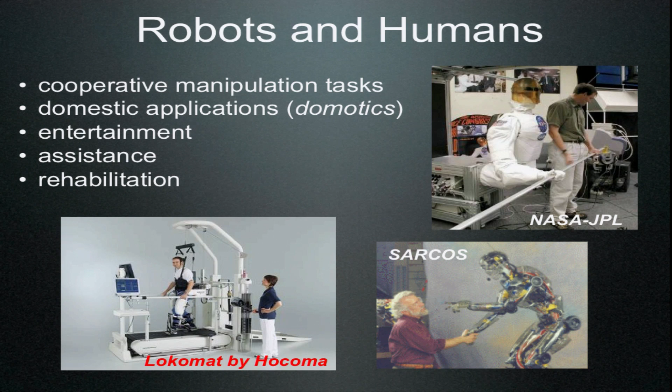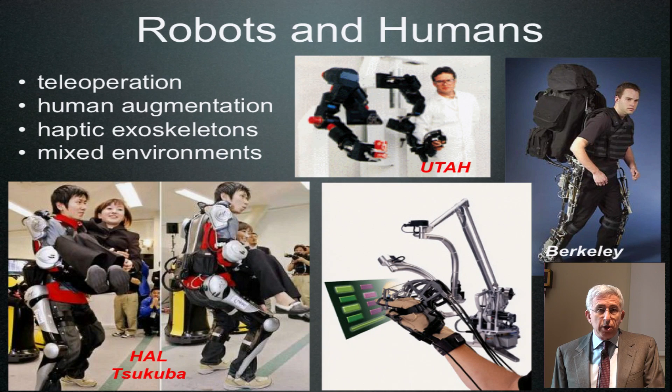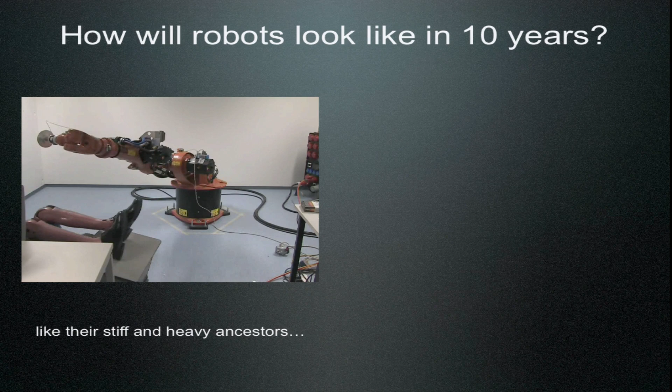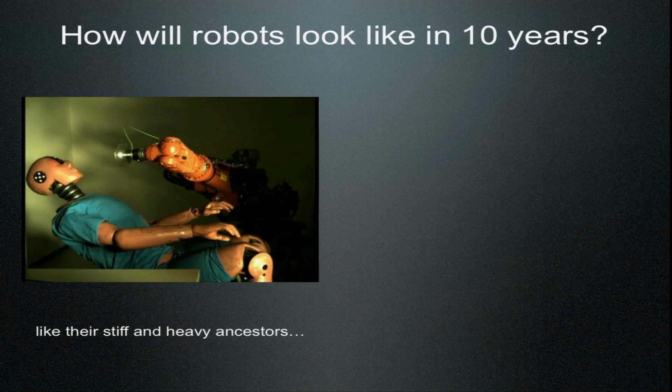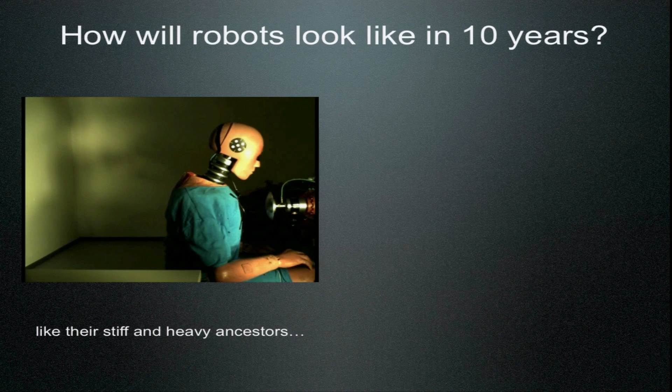So how would robots look in 10 years from now? Here you see a video recorded at ADAC in Germany, the safety institute for automobiles, where they use dummies for crash tests. And now, instead of having a car, this is work done mostly by Sami Haddadin. So they are investigating the harm, the injuries that can happen when a robot is hitting you. And it can hit you in different places.

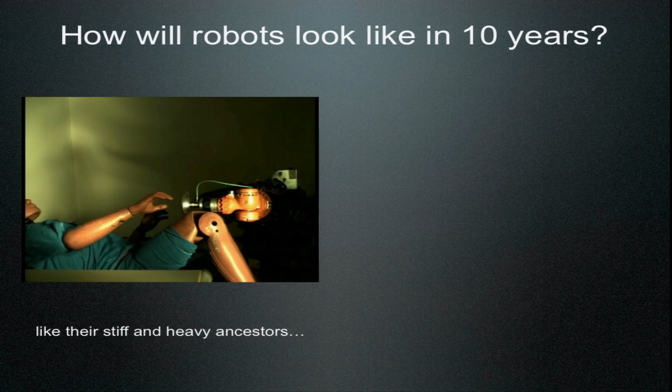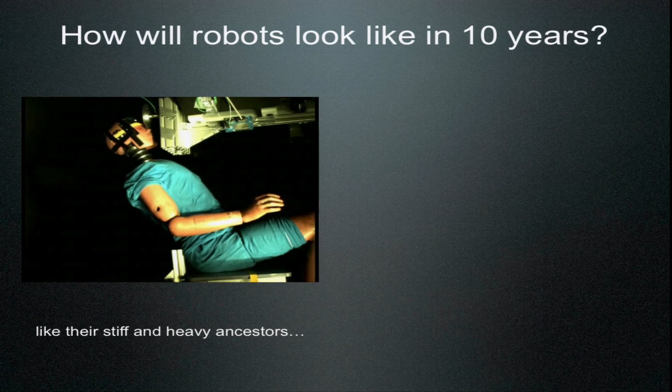But the purpose of this video is not showing this experiment, but looking at the robot. Looking at the robot, the dummy may represent ourselves, very flexible, very vulnerable, and the robot is very stiff, heavy, and could be fast, and could really hurt the human.

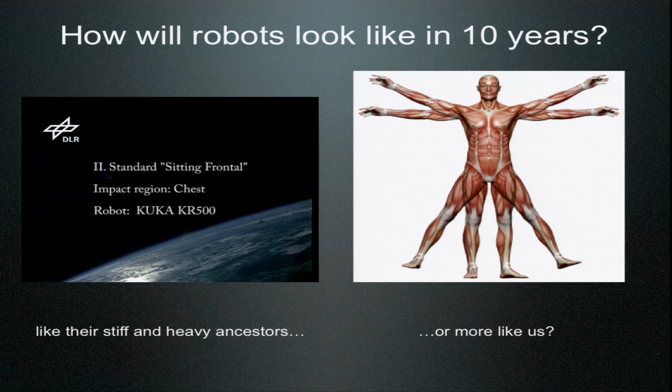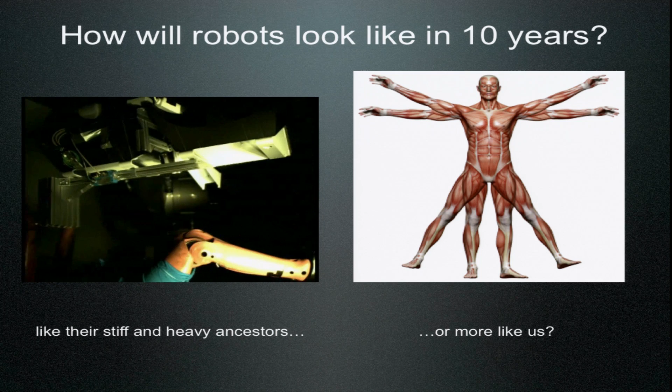So will robots continue to be like this in the next decade or so, or will they more and more inherit some bio-inspired morphology, in particular actuation capabilities of the human, which at the same time are able to perform such different tasks, which involve accuracy when needed, or compliance where needed, to accommodate for uncertain environments, uncertain forces applied to your body, and still provide sufficient accuracy. So performance is not lost at all. Of course, this is a trivial question, because the answer is clearly we would like them to behave like us.

So let's look back at the recent or less recent past. I remember very well all these devices. You may have not seen them at all. I've seen them working. So many years ago, yesterday, there was the famous Unimation Puma robot.

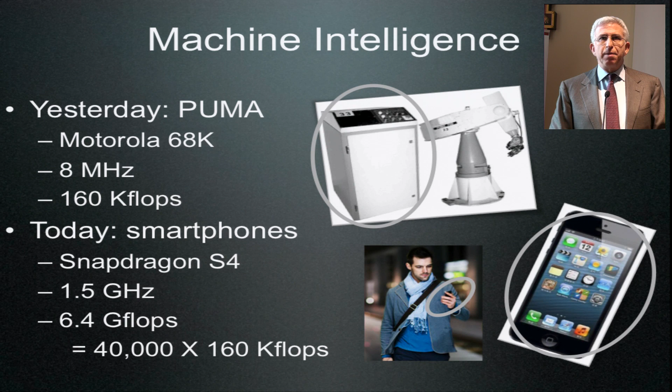This was the first anthropomorphic 6 degrees of freedom all-revolute joint robot, controlled with microprocessors. Okay, actually, the control unit was a PDP-11, a mini computer, which was as big as this. You can tell the size of this. And inside, it had a Motorola 68K CPU with 8 megahertz of sampling and the capability of doing 160 kiloflops operation per second.

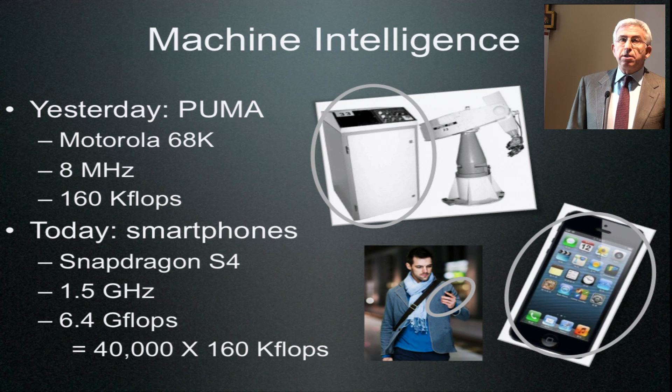Okay, so this was yesterday. In terms of machine intelligence, you could do several things. You could do direct and inverse kinematics, even inverse dynamics for the Puma. This is a result of the 80s, I would say. Now, if you compare the computational power with, for instance, today's smartphone, please turn them off if you have it. Well, there's a factor of thousands of improvement, okay? And in fact, in such teeny devices, we can embed a lot of intelligence. So we would think that this is an advance, and in fact it is also for robots and robotic systems.

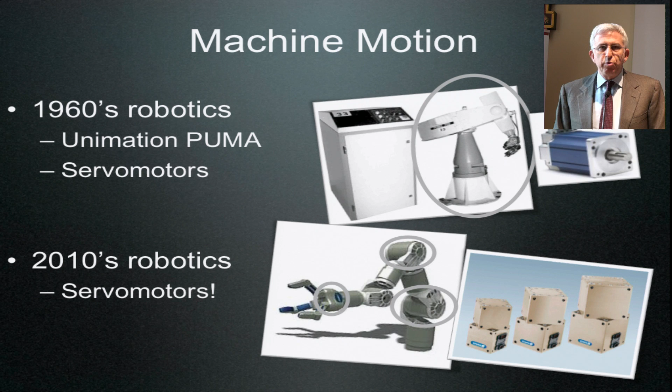What about motion? Remember that a robot is the intelligent connection between perception, so sensing, and action. So the motion is always there. Otherwise, you have just a computer. Okay? So progress in computers and miniaturization and computing power. What about motion capability of robots? So yesterday, the Unimation Puma had servo motors. Here you can see one. There have been a lot of advances in this type of devices in terms of power density, size, cost, and so on. What happens now, or let's say 5 years ago now? Still servo motors. Okay, so not really this 40,000 factor of improvement that we had in other devices.

So the problem that here we want also to help to address is how to make robots that are soft, so that have a morphology of a human body. They are likely not to hurt if they hit a human being, but still strong to sustain loads, carry things like the industrial robots with 160 kilograms of payload or more. On the other hand, we would like to have it simple, because complexity is not something that we're going to sell in the next year, okay? Or at least the complexity should be hidden behind a very simple interface, okay?

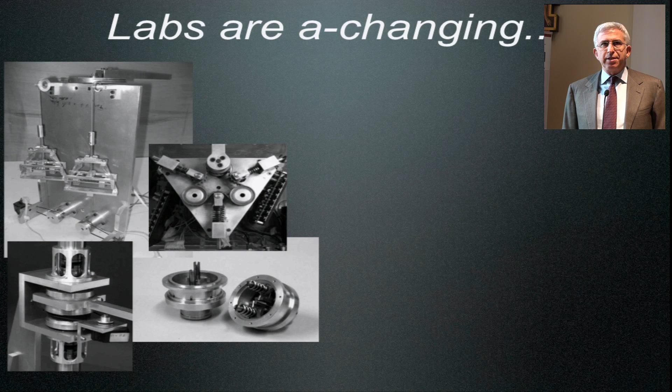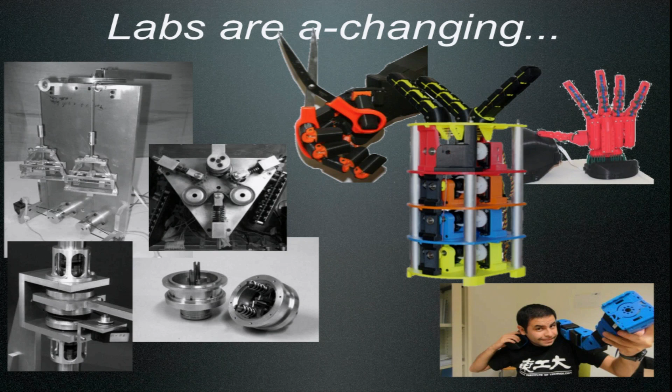So these are some variable stiffness devices that have been developed over the years in Pisa. I can recognize the VS1, VS2, other devices with nonlinear springs acting in an agonistic, antagonistic way. But this is a gray area. It's gray, it's on purpose black and white pictures. Why? Because the latest activities in that lab in particular are full of colors. Full of colors means also full of novel prototypes that can be developed very easily thanks to innovative technology in rapid prototyping, thanks to open source software and open source tools, using the web to grab whatever other researchers have already developed and things like that.

Okay, so the robotics labs are becoming colored, which means that we can explore new ways and test them in relatively short time. This is a very important thing. And you can see here on the right some variable stiffness actuation, the hands, the Pisa IIT hand, and also a modular structure built with the QB modules that you will put your hands on in this school.

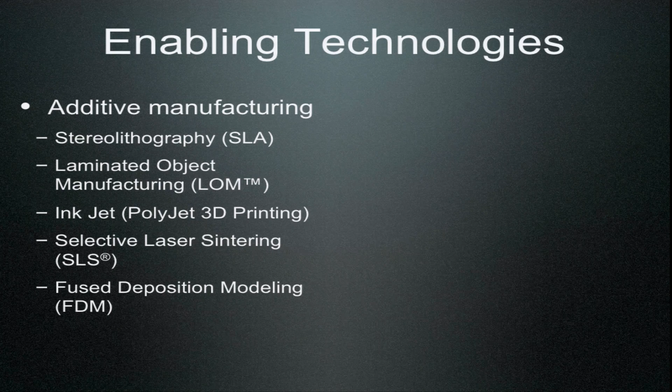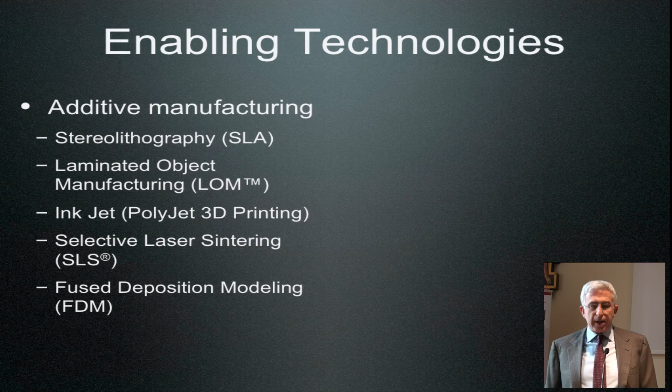So what are the enabling technologies for doing this step? So first of all, additive manufacturing. There are a lot of methods, techniques for building in very short time and cheaply from 3D designs, CAD designs, objects that you can use and test your ideas for developing actuation and, say, connection devices. Here is a list of several of them. You know that the 3D laser printers are really taking speed, and the technology is changing. If you have one of these devices bought 3 years ago, it's already outdated. Okay, because there are much more cheap, compact, and performant devices right now.

And this is just a list of technologies. Together with this, another enabling aspect that allows us to develop new, in particular, actuation devices and full body robots is the availability of open source embedded systems and control systems, like the Arduino project. I don't know how many of you are familiar, certainly the Italian attendees, but not only. There are new sensors, because we try to understand internally what's happening in all the parts of our devices, because this allows us to control them in a better way.

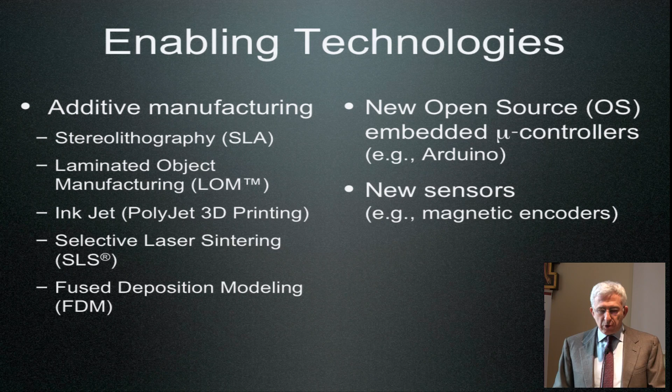There are other tools which are very useful in this development, which allow us to easily obtain hardware-in-the-loop systems, so that you have the hardware developed, maybe rapid prototyped. You don't want to develop the controller in hardware or whatever you need. You have some simulation software that runs, and before doing the last step, you can put the hardware in the loop, just mimicking all the things that you may expect when you're really implementing things. And this is also very useful.

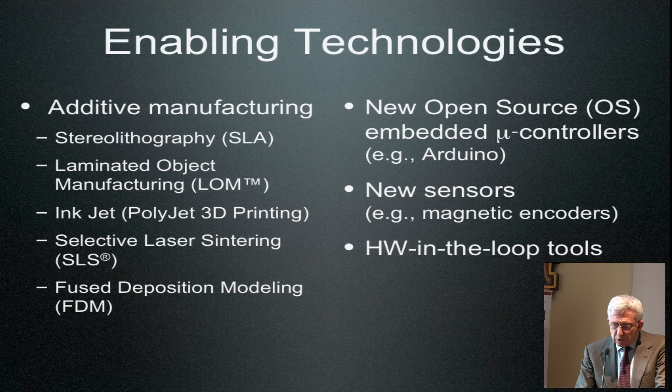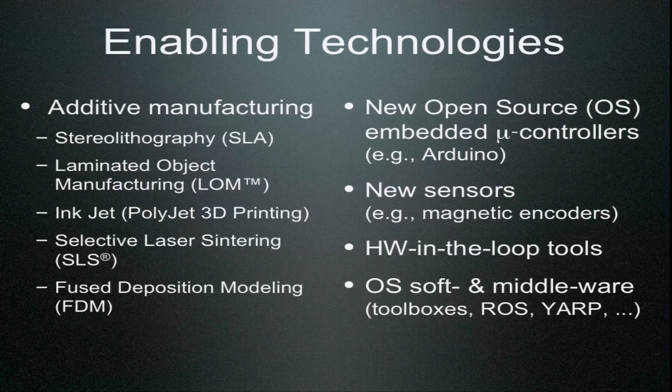And then there are other open source tools which help the work. So software and middleware: everybody I think is familiar with ROS. Other toolboxes are available in this same sense. YARP, Yet Another Robot Platform, which is a very thin middleware supporting the iCub activities, and so on. So these are technologies that may help. But of course, we should join technology with science.

What are the main ideas that could inspire us, and actually have inspired many researchers already? They are coming from the biological world, in particular actuators. So we are immediately thinking of how human muscles behave. And the first observation, very simple, you can try it on your body, is that each joint has at least a pair of muscles moving it. And they actually move in an agonistic-antagonistic way most of the time. Actually, this is a modelization, a simplification of the real actuation in human bones and joints. But you can think of groups of muscles acting in this competitive way.

And this kind of activation of those muscles, which is also called co-contraction, allows you to do the same motion in two different modalities. You can have my arm moving, fast or slow, it's not important, but moving in a very soft way so that I can deviate from this trajectory very easily, or I can stiffen my muscles and move it exactly like before, but now when I hit something, I will never leave the path. So this possibility of performing motion while controlling at the same time another variable, which we call stiffness, is very intuitive, but this is exactly what happens in human muscles. And this was the motivating idea also for reproducing these pairs of actuators inside a single joint actuation device.

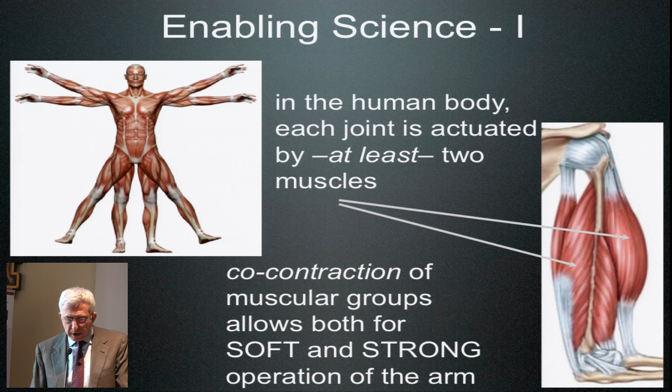So a couple of things coming from biomotor studies. You will probably hear more about that in one of the presentations, probably by Etienne Burdet on Monday, I guess. He will talk about motor control inspired by biological studies. So the first thing is this equilibrium point hypothesis. You can read whatever is written, so I will be very brief here. But actually there's a threshold for activation of muscles, for each muscle, and of course, pair of muscles. And the idea introduced, or better said, proved in this paper in 1998, an idea that was around even before, is that

if you give an external load to such actuation muscles and you release the control so that you leave the system to evolve and find its own natural equilibrium, then there's always a situation which is called the equilibrium point, a combination between muscle length and force that is naturally associated to a given load. So the muscle may be not loaded or loaded with 10 kilograms or whatever, then there is a natural equilibrium associated to this condition, which involves the contraction, so the length of the muscles, and the force applied by the muscles. So this kind of agonist-antagonist scheme is what suggests that even artificial single-joint devices may behave in the same way if properly actuated and controlled.

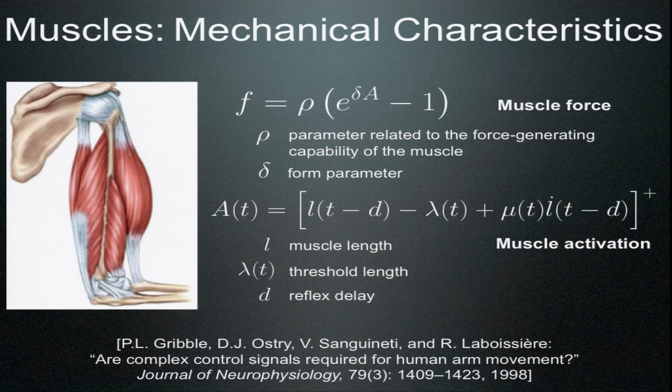So if you put this together, you have some expression which relates activation, which is controlled by the nervous system, to applied force by a single muscle. If you have a couple of such muscles, then you would like to find this equilibrium, as we said. So depending on the load, there's a different equilibrium. So the steady state equation is very simple.

If you think that the muscle applies a linear force, you want to balance a torque, so you need a distance, a lever arm. So R will be this lever arm. F1 and F2 are the forces applied by the single muscle in this agonistic-antagonistic configuration. So you have this balance equation. And now you can assume that R does not change, which is an approximation, but it's okay. And also that the two muscles have the parameters rho and delta equal. So you can write the force F1 and F2 for both muscles and the activation expression.

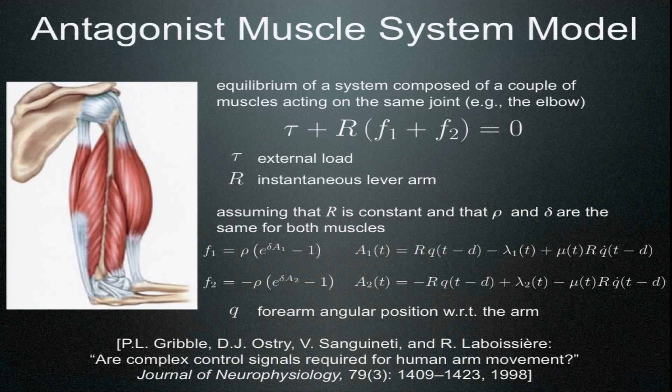And you introduce now a variable Q, an angular variable, which is the rotation of the joints that these muscles are controlling. Okay? So this is the setup. And now if you neglect the reflex delay, just for simplicity, and assume that you are at steady state, so Q dot is equal to 0, so the joint is no longer moving, and make the assumption that there is no load, but you can change the load, so it's constant actually. You can find an equilibrium position Q bar, so this is the equilibrium position with no external load. There will be others with external load applied. And you have to solve some equation to find this Q bar.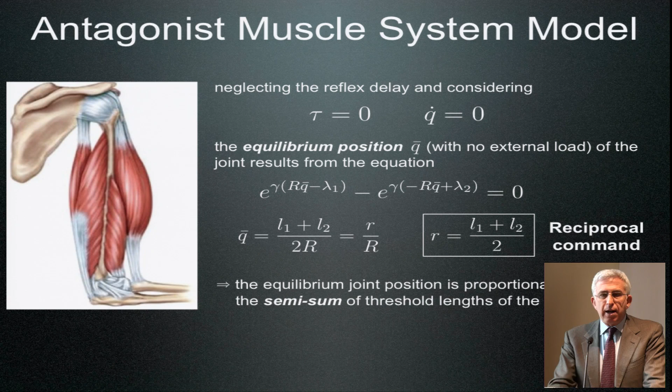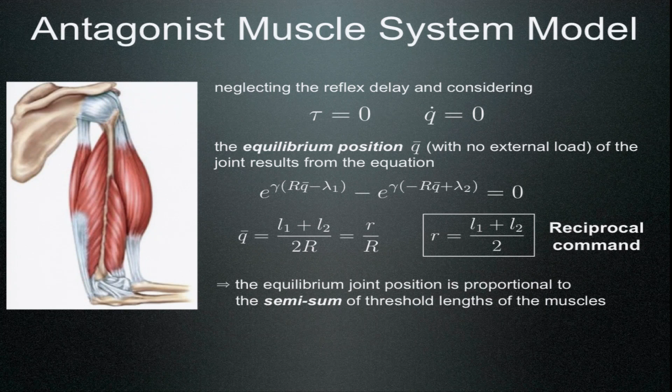But essentially, the outcome is that you have some command, R, which is just the semi-sum of the threshold length of the muscles. Okay, this is quite an important result, obtained in some simplifying condition, but this drives also the design of some controllers for some variable stiffness actuation device.

What about the stiffness? Well, first of all, I hope everybody knows this. How do you compute the stiffness? You compute the stiffness as the variation, so taking the derivative of some applied torque, which balances the external torque, with respect to the variation of the driving joint. Okay? So you can start from a potential energy. You can take the derivative of this potential energy with respect to the position, and you get the torque. If you take the second derivative, so you take the derivative of this torque, you get the so-called stiffness at some nominal operation conditions, so at the equilibrium, Q equal Q bar, and in this case under zero external torque.

And here is the expression for the muscle under hand. And you can find a parameter there, a C, in the exponent of the E function, which is the so-called coactivation command. And surprisingly enough, this stiffness around the equilibrium depends on the difference divided by 2 of the threshold lengths of the two muscles. So we have two functions, C and R, one which is proportional to the sum and the other which is proportional to the difference of this threshold length.

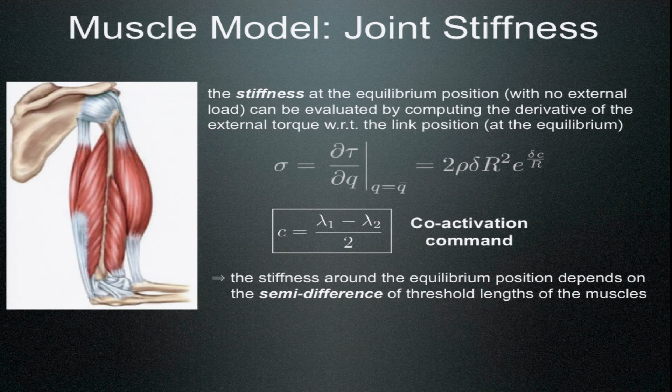So with this in mind, what was the evolution of actuation mimicking this biological behavior? So we started from rigid actuation, so servo motors with very stiff transmission. You can neglect in the limit any deformation. In some cases, this is not true. For instance, if you're using harmonic drives, which enhance the torque level available on the link side of the transmission, you have some intrinsic flexibility. But this is quite reduced with respect to what you can achieve with really variable stiffness actuators.

So this concept of having compliant actuation motivated some researchers to develop what is now widely known as SEA systems, so series elastic actuation, which is nothing else than modeled, at least, as a series of masses, springs, masses, and so on. And probably the springs are also damped. And in the most simple realization, you have a mass, just a spring and a damper, and another mass. The first mass represents the inertia of the motor. The second mass represents the inertia of the link. And this is also called elastic joints. So the terminology of elastic joints and series elastic actuators is misleading sometimes. They actually are the same thing.

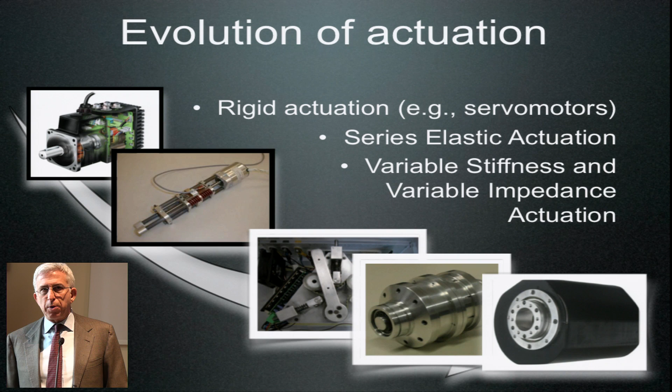So, can these variable stiffness actuators that have been developed in the last few years work as muscles for robots? So the problem from the control point of view is moving from the traditional position control. By this, I mean also trajectory control. It's not just regulating a position, but also following a trajectory in the joint space or in the Cartesian space. For stiff robots, so with rigid links, typically not lightweight, but why not even light, but rigid links and rigid transmission, or as we used to say, rigid joints. This was the first motion task.

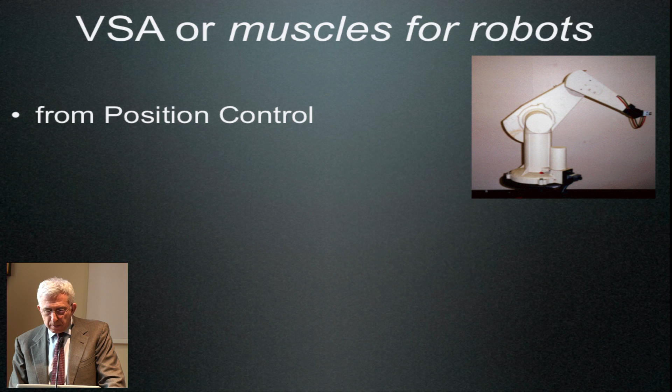Now the lightweight series, there are several. This is the KUKA lightweight, which is just the commercialization of the DLR series of lightweight arms. There are other products on the market, like Universal Robots and so on. What they promise is that you can do torque control. So you can command not a position and have some local controller impose this position or velocity profile, but you can really command torque, torque at the joint level. Of course, this torque at the joint level is useful for applying forces in some point of the structure, typically at the end effector level, but this is a different story. So you can do torque control.

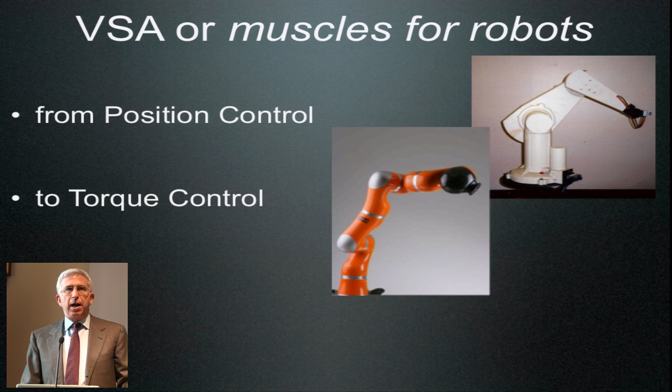Actually, the controller of the DLR, and in part also that of the KUKA lightweight series, and even including the iiwa, allows you to modify some parameter to move smoothly from a pure position control to a pure torque control, and to something in between, which is usually called impedance control. Okay? So still you have only one objective, whatever is the tuning of your controller.

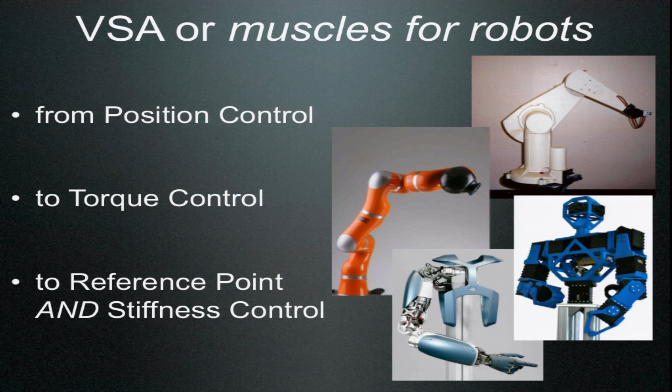Now, if you move to variable stiffness actuation robots, in particular multi-degrees of freedom, and you can see here a torso built by the QB modules, or the DLR variable stiffness actuated arm hand system, now you have a point of controlling two things at the same time, and in particular, these two quantities that you want to control, mimicking the idea of the human muscles, could be the reference point and the stiffness. Okay? So this is the task that you can achieve.

So just looking at one joint, and this is the development at the University of Pisa over the years, they started with a soft arm with two actuations of the single joint, and in fact they built a 3 degrees of freedom manipulator, but each joint was actuated by a pair of McKibben actuators, so pneumatic actuation. It was compliant, it was kind of jerky, not really accurate, but it was implementing this nice idea.

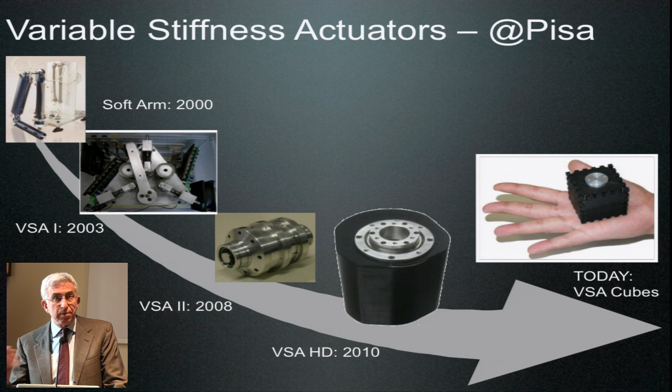And this was later developed into the VSA-2 in 2008, and then here is a VSA with harmonic drives. This is also a concept used at DLR. And today you will see the VSA cubes, which are small, compact, low cost, and this is the rest of the story. Of course, variable stiffness actuators are diffused worldwide. Here you see realizations at IIT, at DLR, in Korea, Japan, and so on.

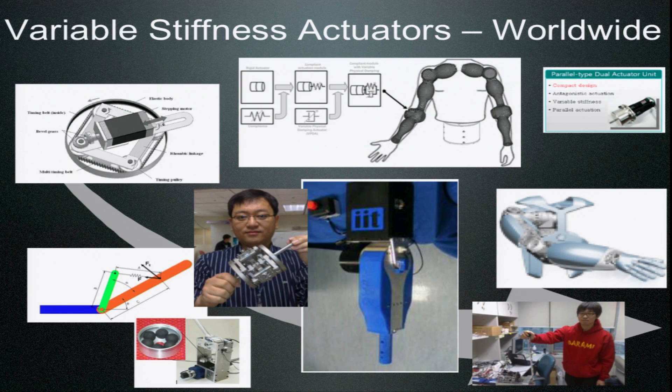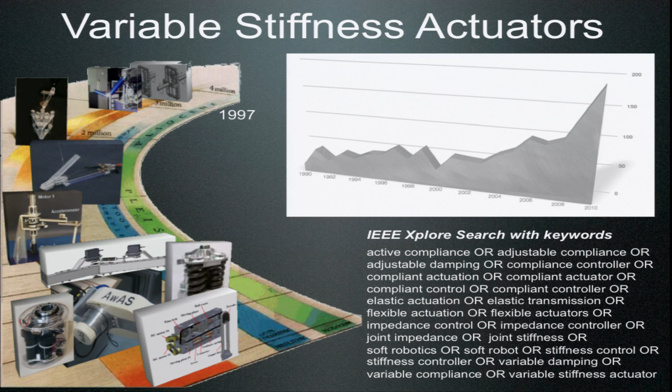So this is not just a brand from University of Pisa or the Italian gang. If you look at the diffusion of technical scientific papers on this subject, here you have a story on the left. You see a chronographic distribution of devices, while this plot is obtained with IEEE Xplore, where you search for keywords related to this problem: active compliance, adjustable damping, compliant control, elastic transmission, stiffness control, and so on. And you see that between 2000 and 2010 there has been a huge increase in activity. So this witnesses the interest worldwide in this topic.

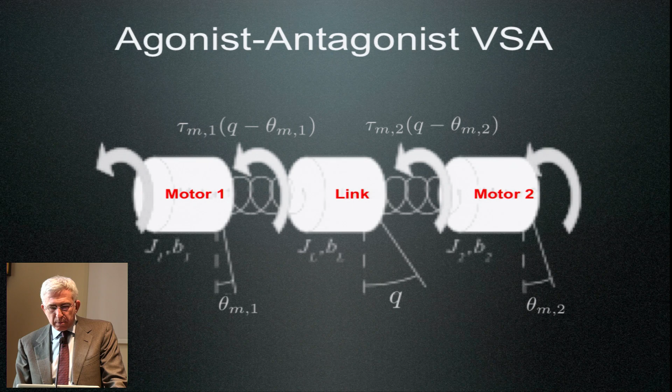So let's say a few words on this, and then I have to skip things. This will be one type of variable stiffness actuation that we will consider, the agonistic-antagonistic arrangement: two motors and one link, nonlinear springs connecting the motors to the link, with definition of variables. And this is what is in fact embedded in one of these cubes that you will be working on. Here you see the torque characteristic, a very nonlinear expression of the difference between the link position Q and the position of each motor, theta M1 or theta M2. So these are the torques acting on the transmission on the two sides.

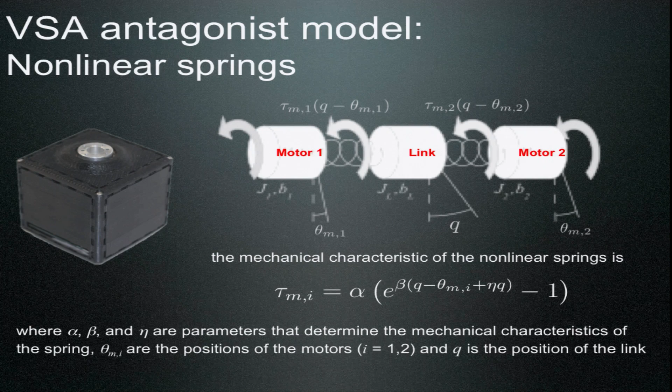And again, here we can mimic the same analysis done for the muscle, so we can find a natural equilibrium position, for instance with no external load, putting velocity to 0. And we find that the reference position actually is the average of the motor positions. Okay? So in particular, if you have the two motors, one pushing on one side and the other on the other side, there's no motion of Q, but of course you can implement some position, but also some stiffness.

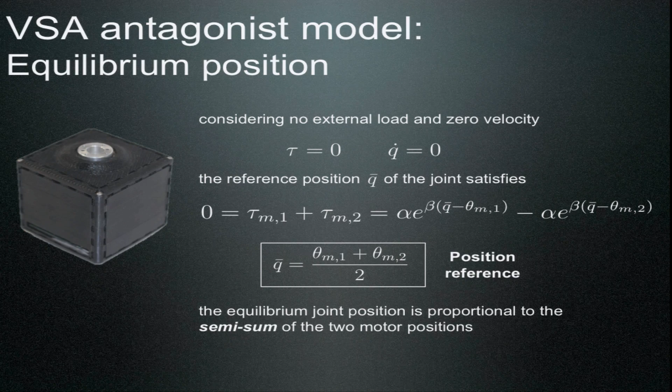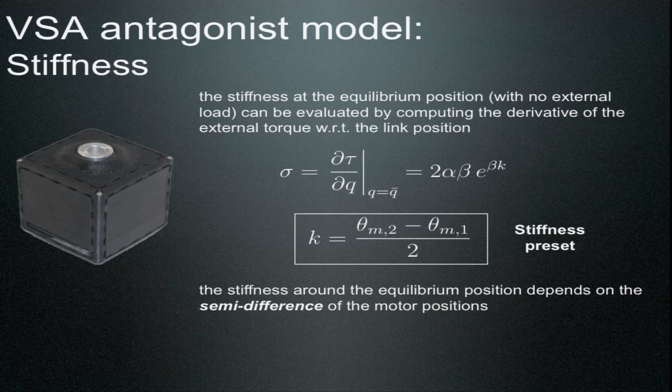So the equilibrium joint position is proportional to the semi-sum of the two motor positions, while for the stiffness you do exactly the same. You take this expression of tau, actually the tau is the sum of the tau m of each motor, and you take the derivative with respect to the link position at the current equilibrium configuration, and you find a parameter appearing in the exponent of the exponential, which is k, the stiffness preset, and this is proportional to the semi-difference of the motor positions. So again, this device emulates completely the behavior of the agonistic-antagonistic muscle pair in humans.

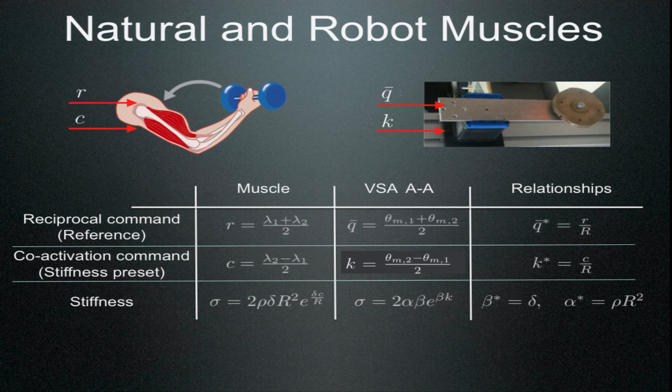And in fact, you can set up a comparative table here. What we call the reciprocal command or reference for the muscles, R, is the Q bar in the agonistic-antagonistic variable stiffness actuation. What we call co-activation command in the muscle is the stiffness preset K in the mechanical device, and then an expression for the definition of the stiffness, and there are also other relationships in this table, but you will hear more on that.

Okay. Well, I will skip this part because of time.

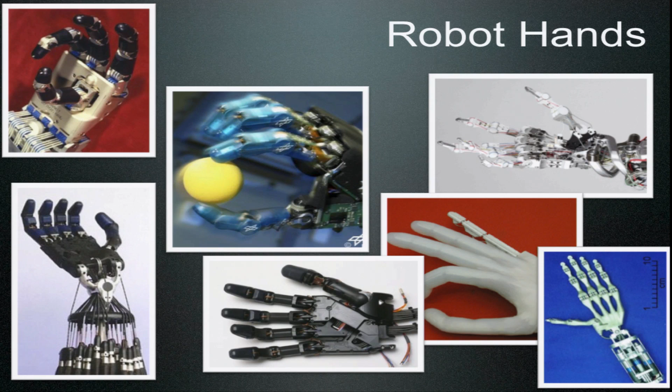So these concepts have been used, and this is really daily bread for Antonio on the hands, and there are many robot hands, just the concept here. Research in this area, including Antonio's and his colleagues', was really looking for anthropomorphic hands, 5 fingers, if not 3, multiple degrees of freedom, opponent thumb, and so on, with a lot of sensors, a lot of actuators, and some intrinsic compliance due to the fact that the actuators had to be relocated and connected through steel cables and pulleys. So very complex devices.

At some point, people realized that maybe this is not the best way of doing things. And in fact, here is the second element: not just the technology, but also the enabling science results were coming from the concept of synergic motion.

So in particular for the hand, there are some studies that had shown some synergy of motion of the various degrees of freedom, the many degrees of freedom of the human hand, and some constraint so that the motion of the single elementary joint cannot move differently from what the others are doing. So there is some cooperative motion which can be represented by an elementary combination of motion. This is the concept of synergy.

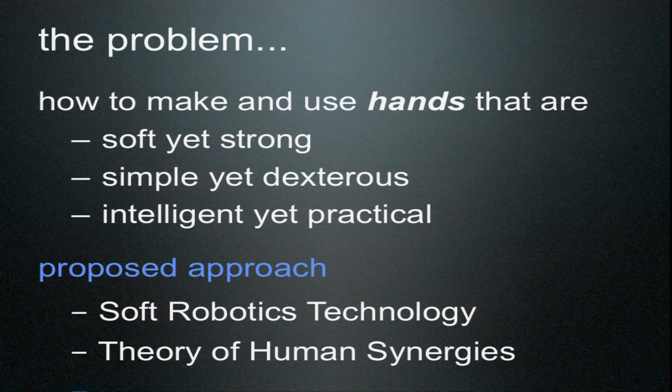So what is the idea? It is exactly the same idea of the variable stiffness actuation for robots. So soft robotics technology, this is a terminology that covers all the things, and some scientific theory behind, which is the theory of human synergy, not just the human muscles like in the actuators. And soft synergies means that we have a grasp, but we can also comply with the object that we are grasping. So there will be a deformation with respect to the reference position, which is the one associated to the synergy. And if you implement this, you're able to be very robust to adapt to a multiplicity of objects, and you will see more on that probably in one.

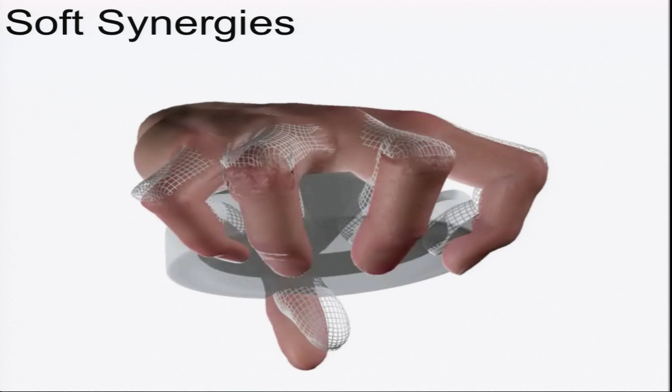And this is the Pisa IIT SoftHand. With just one single motor, you can see it on board and doing multiple grasps. Maybe some of you have seen some video of that.

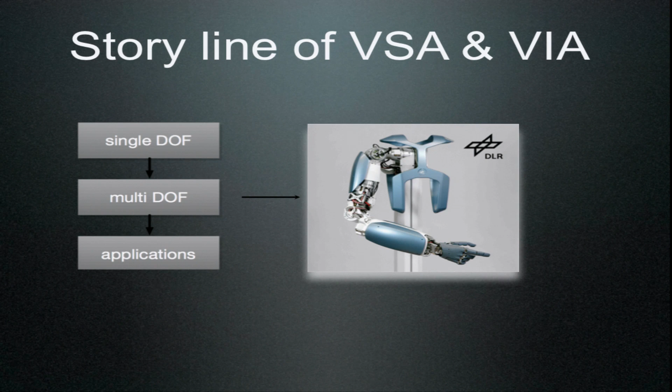So why this Natural Machine Motion Initiative? Okay, so this is the storyline of variable stiffness actuation and variable impedance. We started with single degrees of freedom, then integrating this in a larger structure, multi-degrees of freedom, and then going to application. And there are a huge number of applications for locomotion, for manipulation, as we have seen. If we want to realize highly dynamic tasks like throwing an object as far as possible, if we want to have a physical human-robot interaction under safety constraints, which means that we have to comply, detect collision, and react in a very compliant way, if we want to do haptics or telemanipulation, wherever we have an environment that presumes that you may collide with it, and so on and so on.

We could go on forever, but the idea of this initiative is that a group of very smart researchers can think about applications, but this does not cover the whole world, okay? So we believe, we suspect that there is a much wider set of applications, and the idea is to do crowdsourcing. So building up a community, distributing materials, sharing ideas, sharing results, experience, so that the trust in this will be larger, and some unexpected application may pop up somewhere in the world. So this is the Natural Machine Motion Initiative, and this is the logo of this initiative.

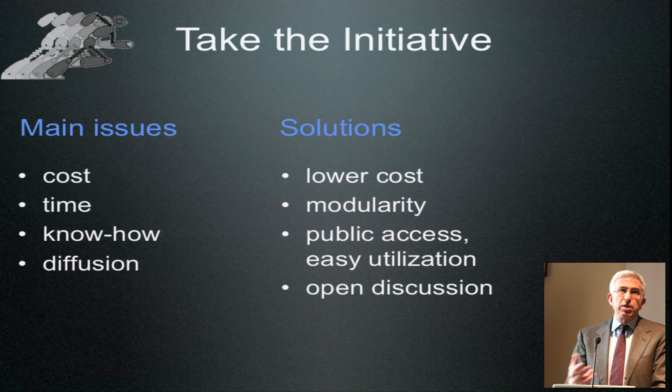So the main issues were the cost to develop these devices, the time needed, you need some expertise, so the know-how, and also the fact that if these devices are not diffused in the world, you have problems, because you don't have this kind of gathering of ideas, of factories producing solutions. So the solution that is suggested is having something which has a lower cost, is modular, so that you can build your own robots. Everything should be public access and easily usable. And then there should be an open forum of discussion, like a wiki, where everybody puts their experience.

So this means that a fully open platform is needed, both in software and in hardware, the electronic and mechanical part, and this is what the Cube is doing for you, so that you can either buy a full set or design your own following the datasheet given, both for the mechanical part and the electrical part, okay?

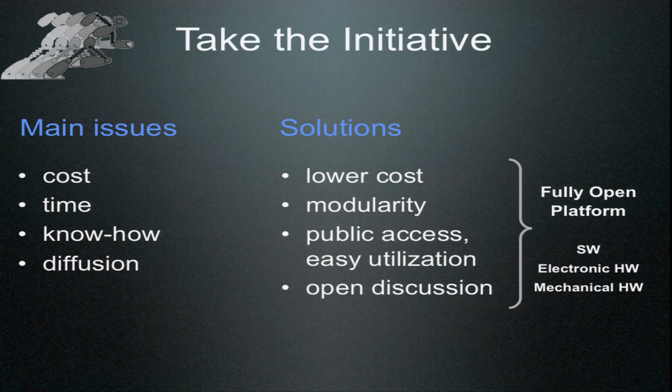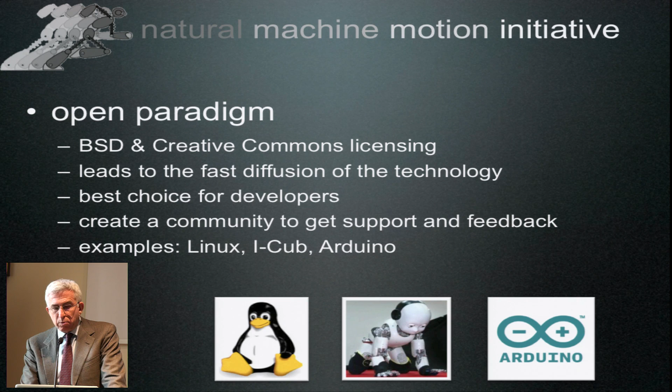The open paradigm follows some previous idea, the Berkeley type of copyright or Creative Commons licensing, which helps in the diffusion. And the idea here is that we want to start creating this community. And there are other examples in the computer science or even robotic world, like the Linux development or the iCub or even the Arduino.

The website, I guess that you have already visited it. It's divided in 3 main sections. One is exploring, one is documentation, and one is joining events like this one. So exploring, you can find several drawings of actuators, accessories, full system, and so on, so that you can make also things by your own.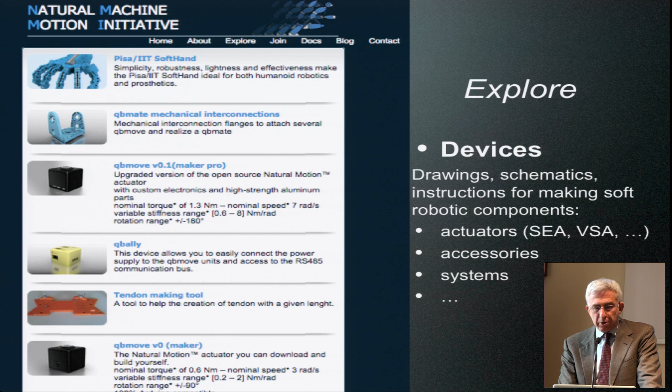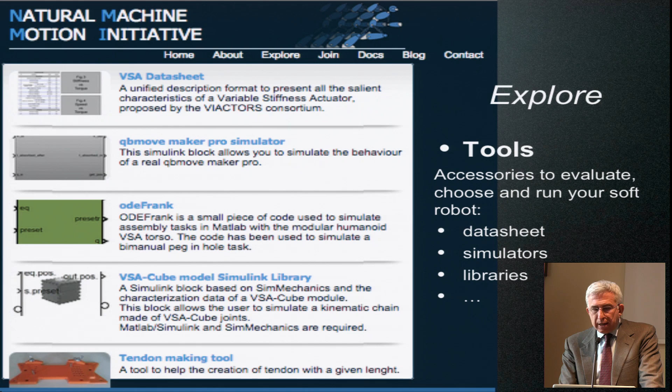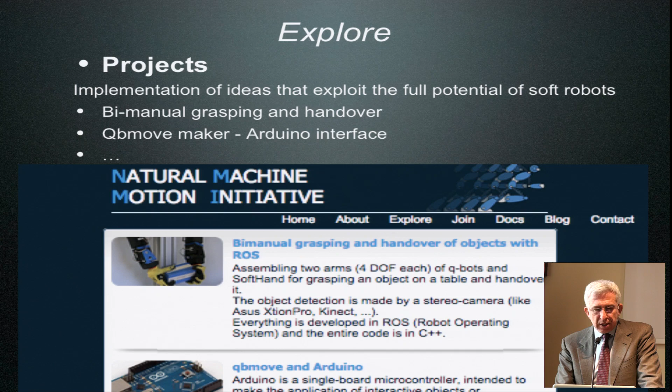The tools are data sheets, are simulators, for instance in Simulink, and in other SimMechanics, libraries of codes already developed by the group and by the other members of the community. And in fact, you can look also at some initial project like the bimanual grasping and handover, or the Arduino interface for one of these devices, the qbmove maker.

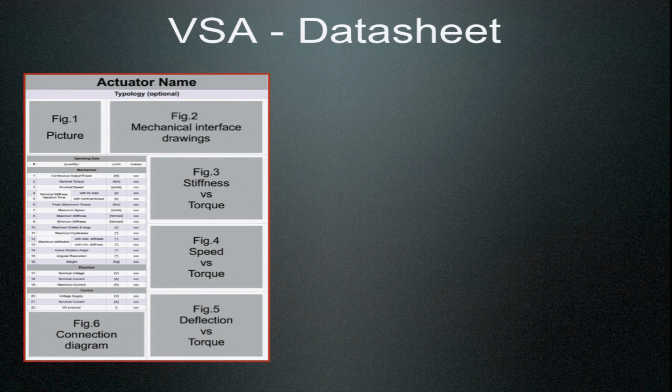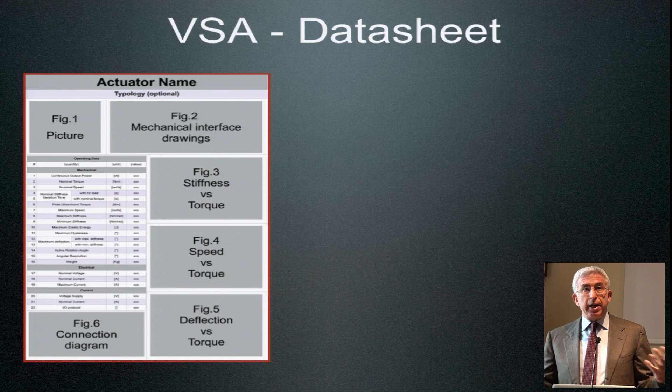So how do we qualify one of these actuators? Like a DC motor. DC motor, you look at the characteristic of current torque or whatever, voltage torque, and this is it. Here you have multiple things to keep under eye. It's not just motion, but it's also stiffness, range, speed of variation, and things like that. So you need a data sheet which can be used for any new devices. And this was the effort here.

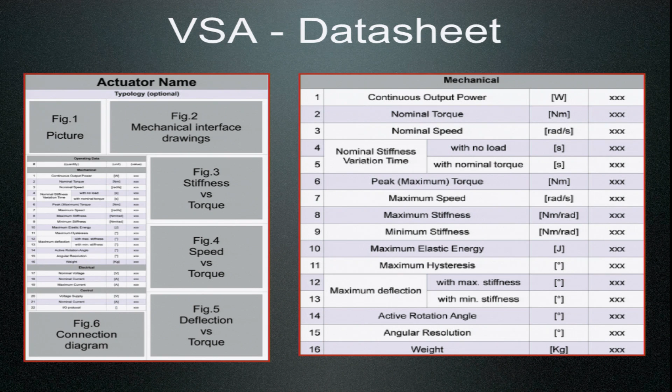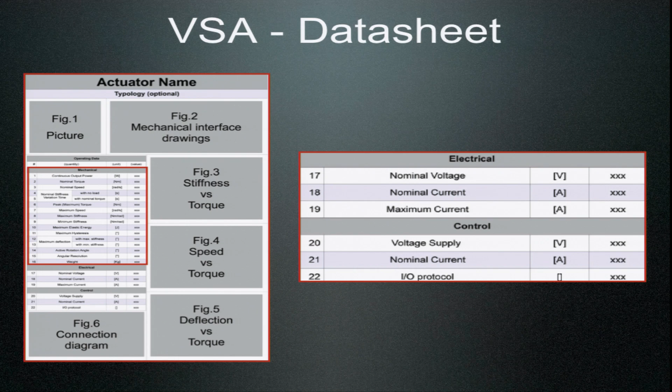You see some of the parameters that are of interest: maximum speed, peak torque, minimum stiffness, maximum stiffness, and so on and so on. And you can find some of this data sheet in the website. And if not, you will find it in the website of VIACTORS. Also the drawings, the mechanical interface of the electronic part, these characteristic curves, and things like that.

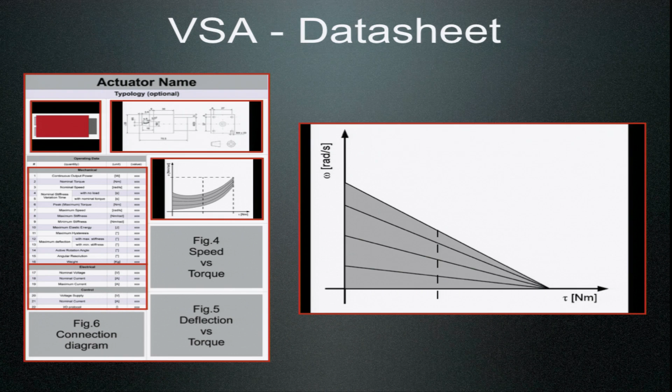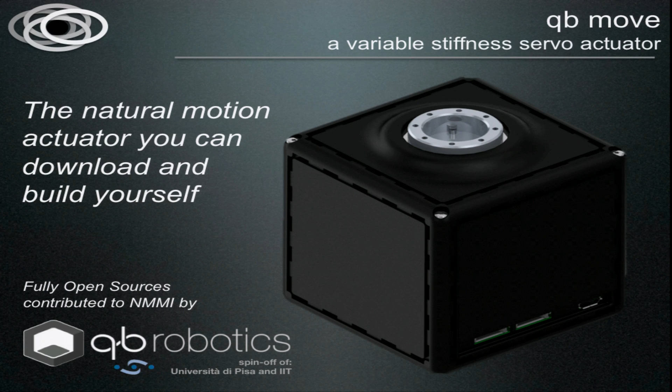Okay. Finally, through the website, you can reach events like this winter school, and you can contribute by sharing your project, and most important, taking the initiative. Once you become acquainted with these devices, and if you like it, as we hope, you can become an ambassador of these things. There's no money involved at this stage, remember. And this is the QB Move that you will be working on in the hands-on session. And I can stop here.

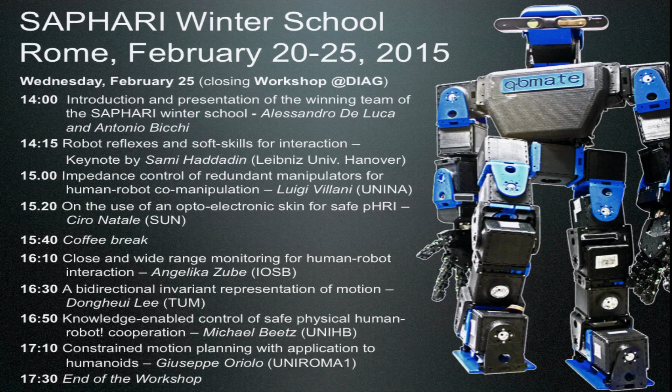But you're kindly invited, actually this is part of the school, to the afternoon workshop, which will take place in my department here. We will start with the presentation of the winning team of the winter school. There will be other attendees, not just the persons from the school. There will be the partners in the SAPHARI project, the reviewer from the European Community, students from my department, and other Italian researchers coming on purpose for this event.